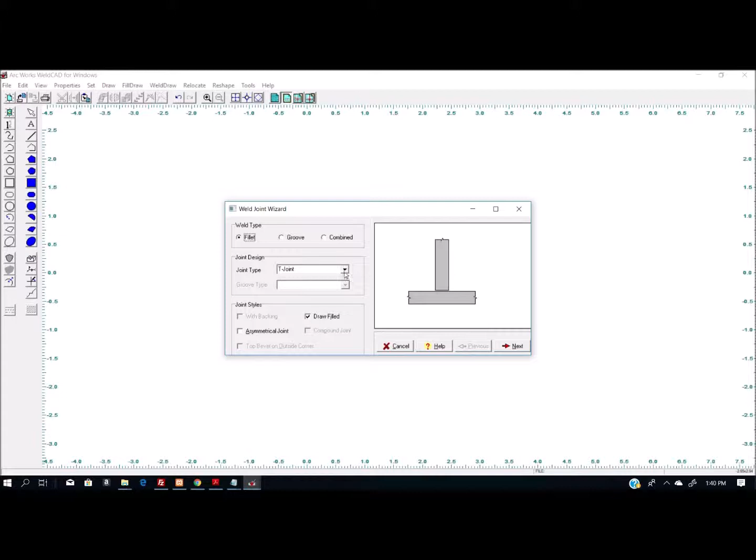Once the program's open, all you have to do is go up here to where it says Weld Draw, select Joint, select the weld type. Whenever I select the weld type, it will filter out what's available down here. We're going to do a groove weld on a butt joint with a single V, so we're going to use backing.

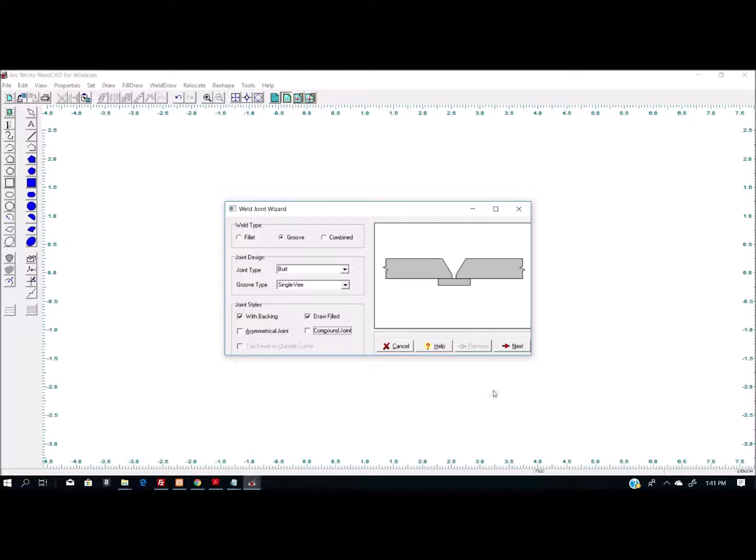The draw filled option just turns off the fill in the graphic. Asymmetrical joint is if the joint is not even on both sides. Then it will ask me some questions about the rest of that. Compound joint is for compound bevel. Hit the next button, and I can put in my values for the material right here.

Notice my root face is 0. I don't have a label for it because I don't want a label, but that actually won't keep the label from occurring — we can fix it in a minute. Hit next. I've got draw weld passes turned on, but I can turn that off if I like. I can also turn on pass numbers if I would like. And the number of passes, which is the number of beads in the joint, is there.

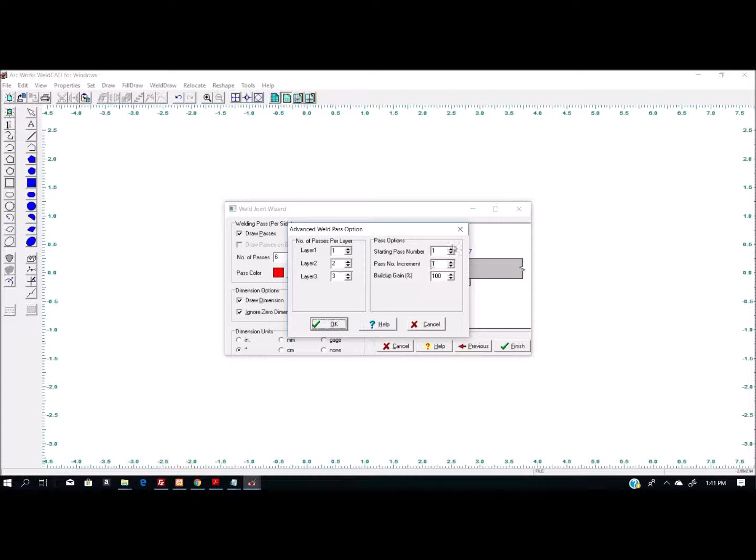Number of layers — I can detail those a little bit closer. Layer number 1 has 1 pass per layer. Layer number 2 has 2 passes per layer. And layer number 3 has 3 passes per layer. I can also change some of the options about the passes.

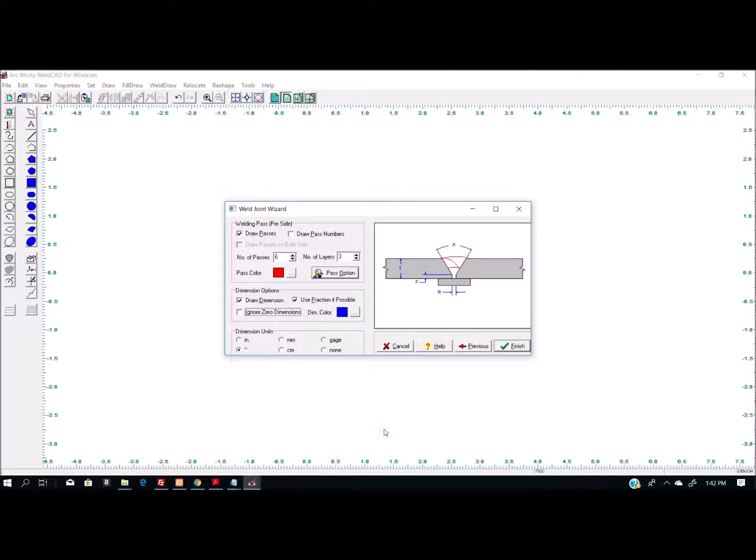Click OK. Draw dimensions can be turned off and on. Use fractions if possible can be turned off and on. And ignore 0 dimension — with this turned on, that 0 root face we had earlier will not show up as a dimension. With it turned off, it will, and I'll fix it in just a minute. Hit finish and place my joint.

If I want to change something about the joint, I can just double click on it again and it will go through the same set of dialog boxes. I'll get to the part where it says ignore 0 dimensions, click that, hit finish, and now you'll see that 0 dimension is gone.

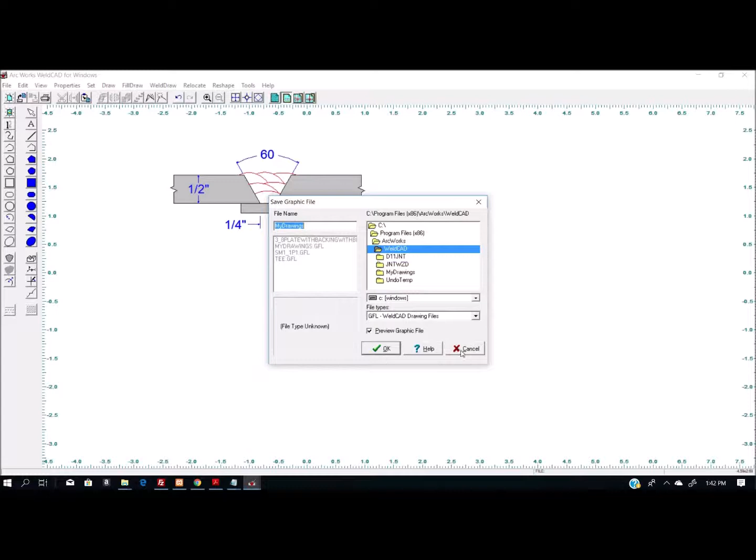There are quite a few ways you can get this drawing into another file or another program, but the ones over here that are native, as far as save as, where you can change it to a different format, sometimes don't work very well, so I try to avoid those if at all possible. One of the easiest ways for me to do it is just to select it, right click, and copy. Now, with it copied to the clipboard, I can paste it into almost any application that I want to.

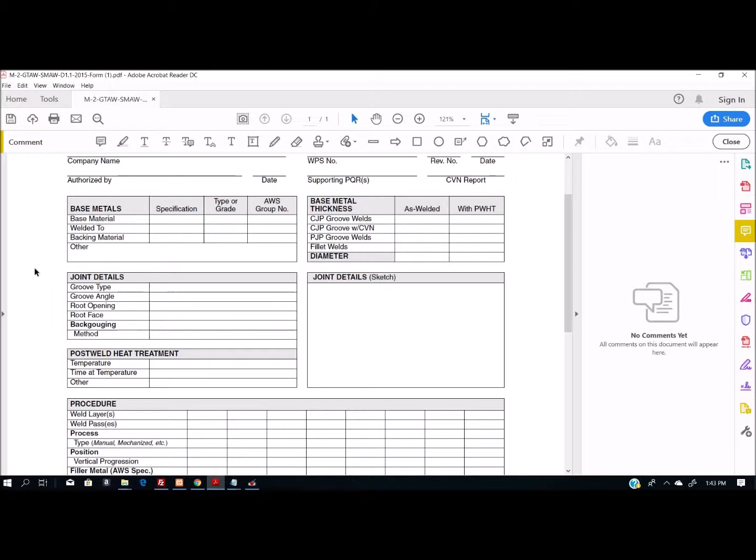So I'll go ahead and open up the AWS D1.1 WPS form. Click over here in white space — I don't want to click right here, let's see what it'll do. You notice it won't paste in there. If I click over here in the white space, hit edit, paste, now my graphic shows up. I've got to resize it. If you notice, it showed up as a comment right here, so sometimes it's hard to click on it once we move it around some. Make it smaller.

Put it in here. Okay, now that I've got it in where the joint details sketch goes, which is actually intended for text, it becomes a little bit harder for me to select it.

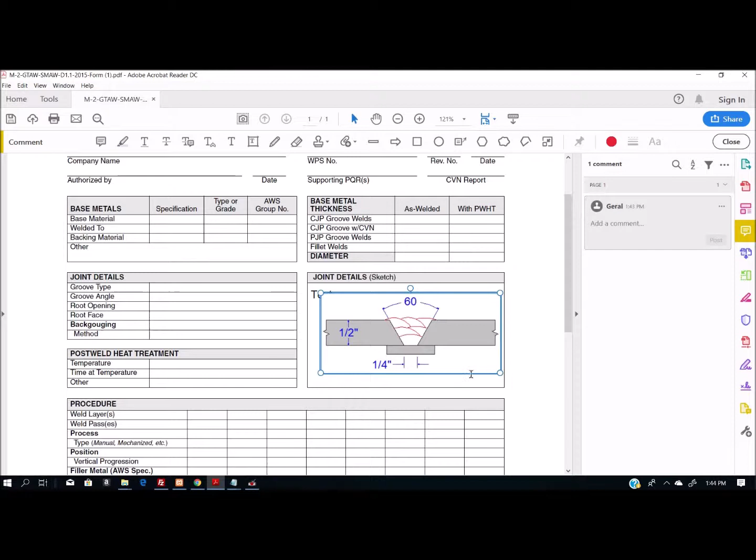Not a big deal in a PDF document. I just go over here. It actually shows up as a comment, and now it's selected and I can see it. Still not very easy to get a hold of to move, but at least I've got that much of it done. Okay.

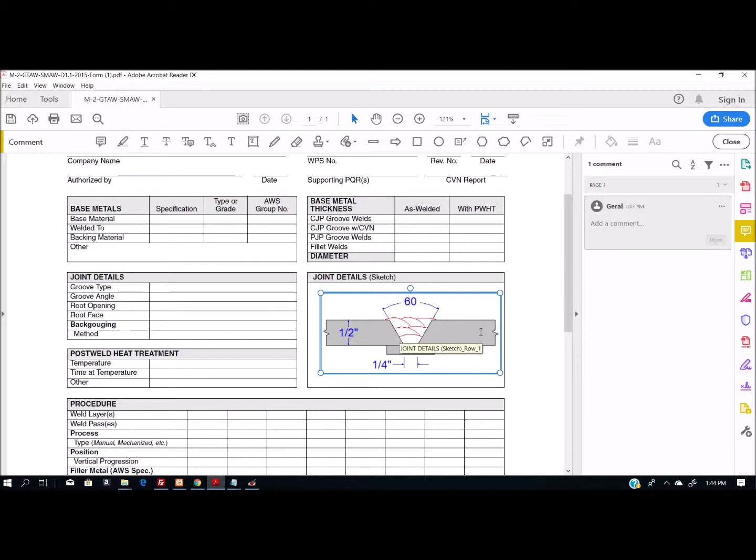Delete that text. But once it's placed in that box, it becomes pretty difficult to move again. There's a couple of ways you could overcome this, but that's one of the methods that I can use to get it to another document.

And I can do the same thing in Microsoft Word, or I'll just go ahead and open up Paint. There's Paint. Paste. There we go. I can crop it, and then I can save it in other file formats that are a little bit more updated, more likely to work in other programs.

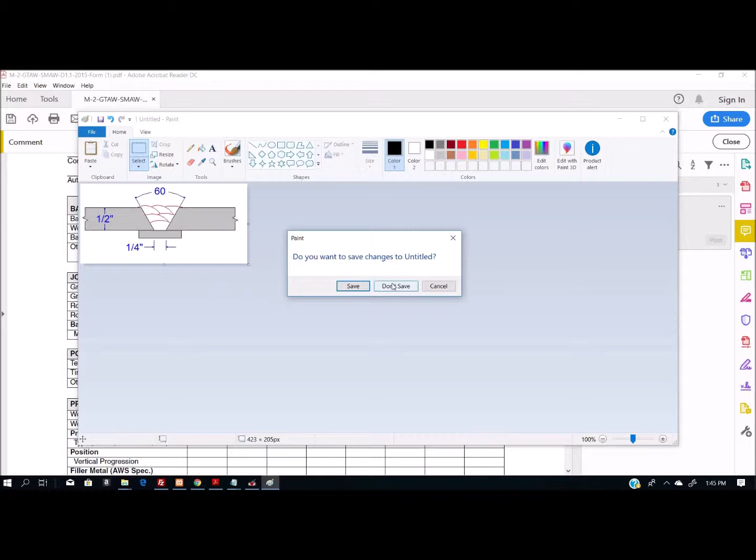So that's drawing a weld joint. There's other options where you can draw just individual weld beads. Okay, you can draw welding symbols.

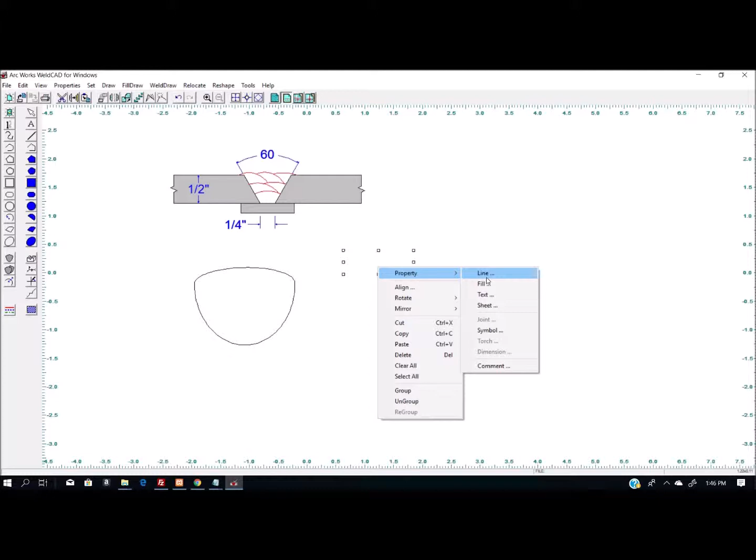Change the property of it so we can see it. Change the size of it. There we go.

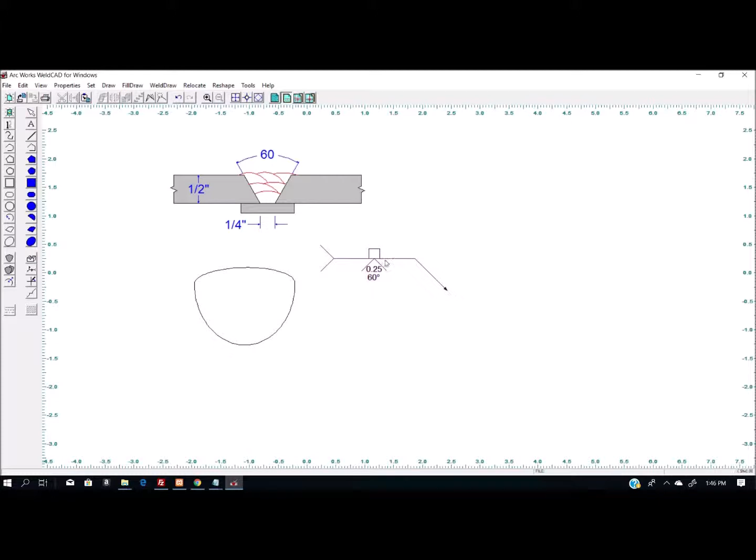So it's a pretty quick down and dirty way to make some welding symbols, make some joint sketches, draw some bead profiles. It actually has an option for drawing a torch. I'm just showing travel angles and work angles. So it's kind of neat that way.

Again, I'm not sure what the current licensing requirements are. I know I've had it on my machine since, I don't know, it's been early 2000s.

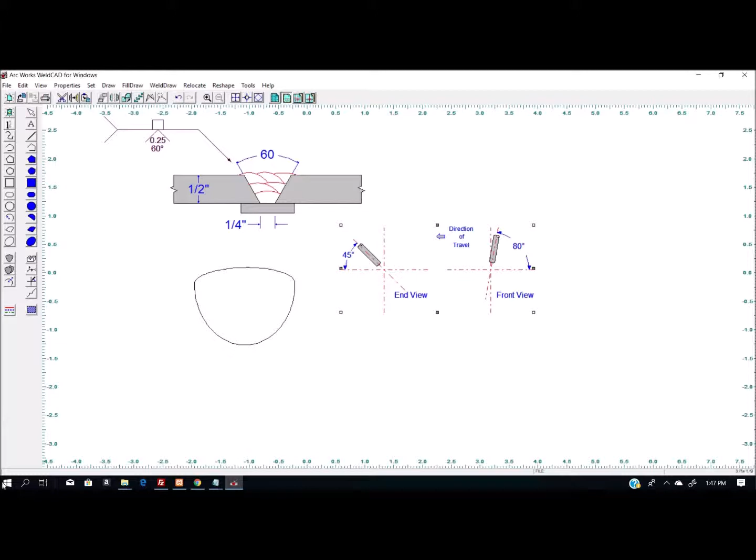The other program that's available to do this same thing with is from CEI. I believe it can be downloaded on the internet. It's called Weld Toolbox CAD.

So here it is. Not much of a menu system. Go ahead and maximize it. I believe that's the joint wizard. So a little bit larger. And hit finish. That's it.

The bad thing about this one is I cannot figure out how to save it as another file format. It looks like it just shows as a WTCAD file.

I can select it, but it doesn't seem to give me the option to copy. Okay, I can select it with my box. Nothing happens. No option to right click or copy it. Okay, I do have the option up here to save the design as a bitmap. But as far as copying and pasting it directly into another program, doesn't look like it's going to happen.

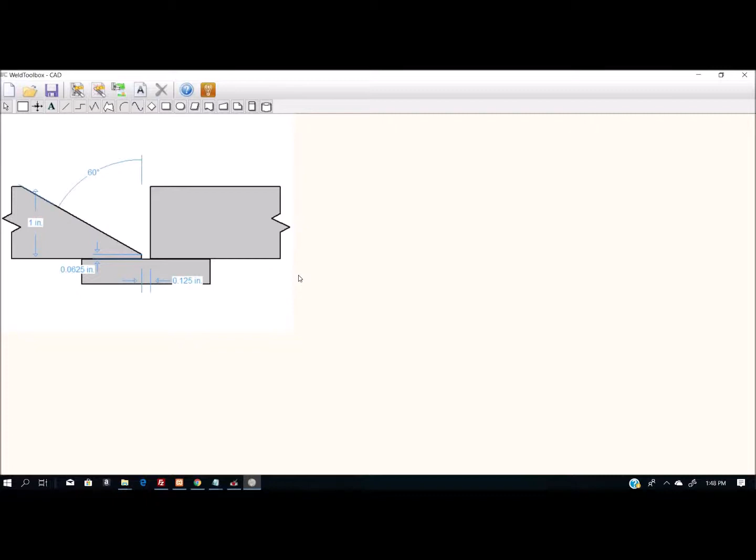There are other things up here that can be drawn, and I'm not exactly sure. Looks like flowchart symbols, but not nearly as many features as the program from Lincoln.

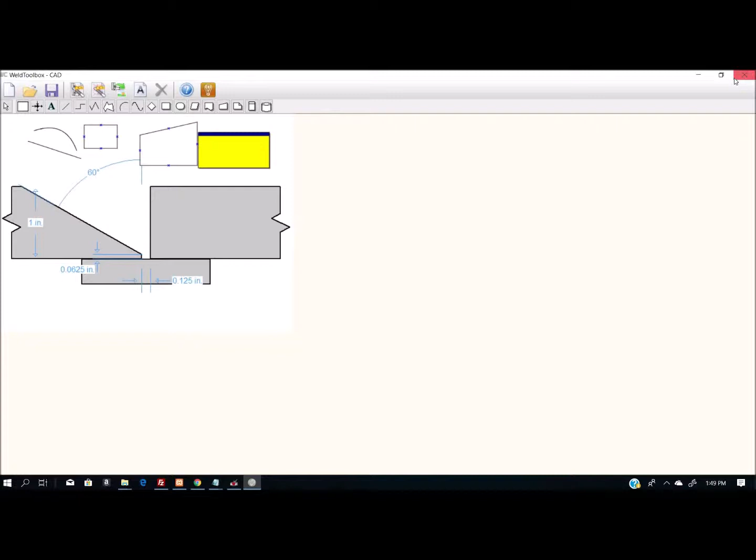Those are really about the only two programs that I know of that are specifically for drawing welded joint designs and weld symbols. That doesn't mean you can't get some scripts for some other programs, or that there's something out there that does this also. These are just two that I'm familiar with.